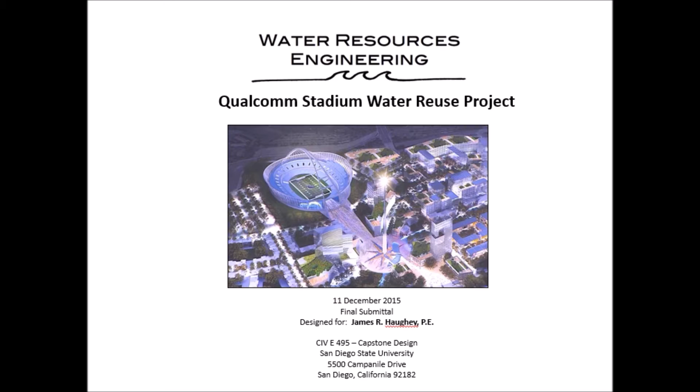WRE is composed of 6 engineers, from left to right: Environmental Engineer, Jose Alcaraz; Civil Engineer, Rob Lane; Environmental Engineer, Heather Tegley; Environmental Engineer, Fed Pinancos; myself, the Project Manager and Civil Engineer, Ismael Marquez; and Environmental Engineer, Lauren Miller.

Qualcomm Water Reuse Project's main objective was to develop a conceptual plan that could be implemented as part of any future redevelopment of the current stadium. The conceptual plan has 2 criteria that must be met. 1 is develop an alternative water supply that could be used to offset the potable water demand, and 2, develop a water quality plan. Additionally, since the region has been grappling with a prolonged drought, water features developed as part of this plan will allow the city to illustrate the value and importance of water in the region.

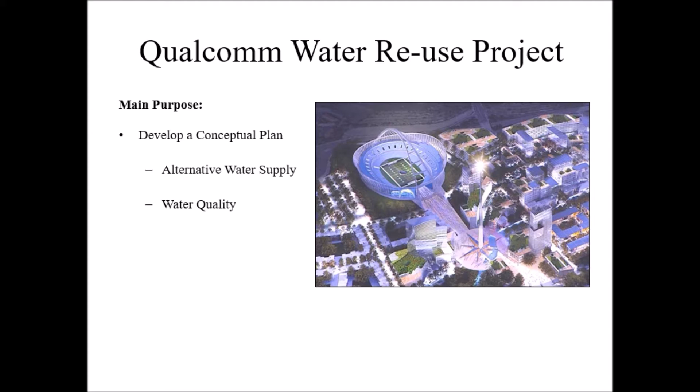WRE vetted several plans, each unique in their approach, but settled on the plan presented on the next slide. In the conceptual plan, it has been assumed that any future development will include condominium high-rises and, as such, will require underground parking structures. WRE proposes incorporating a dewatering system that would capture the water and repurpose it for use as non-potable water.

Additionally, the Serra Mesa watershed currently dispenses dry weather storm flow into the storm drain infrastructure located in the northwest corner of the property. WRE proposes capturing this water and also repurposing it for use on a future development as non-potable water. A microfiltration system will be used to clean the new water sources before storing it in an underground storage reservoir that will be detailed later in the presentation.

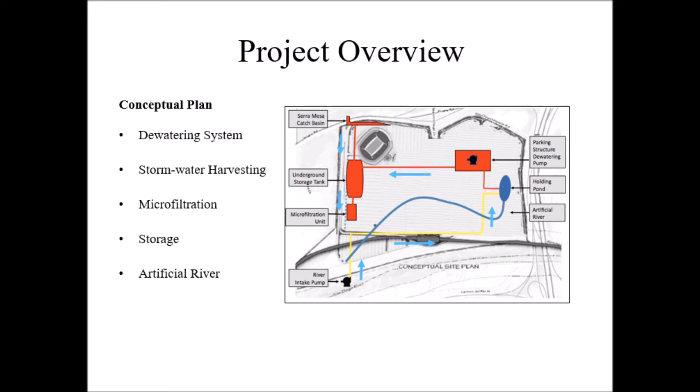The final component of the conceptual plan is an artificial river, an idea that has been floated around by various entities. The artificial river serves 2 purposes. 1, it will be a local attraction for businesses surrounding the river, and 2, it will offer the city of San Diego a venue from which to highlight the importance of local water supplies.

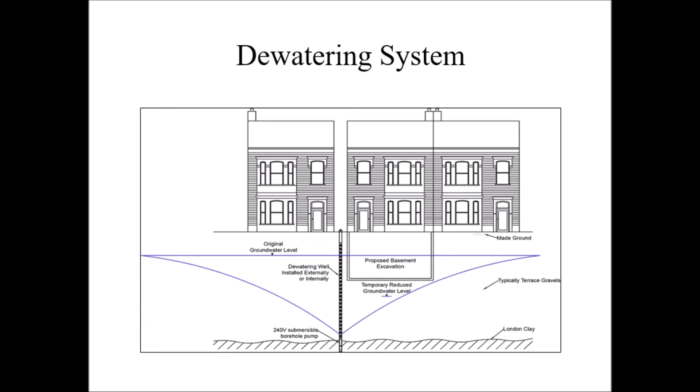Hi, my name is Lauren Miller, and I'll provide a brief summary of our permanent dewatering system. Councilmember Sherman's visionary plan for the Qualcomm mixed-use facility leaves very ample space for WRE's water reuse endeavors. With this in mind, WRE intends to put a 40 million gallon water storage tank, which is about 450 feet in diameter and 40 feet high, underground to optimize the ground level area for the mixed-use facility.

Oftentimes when excavating for a foundation, you may encounter groundwater. Now, for most, this could pose a problem, but WRE proposes to transform that problem into a solution. Based on some of the parameters from the geotech analysis, such as the hydraulic conductivity of the soils and the groundwater elevation, we will be implementing a permanent dewatering system consisting of 29 deep dewatering wells around the circumference of the tank to lower the water table approximately 15 feet, which in turn will produce a flow of 1.4 million gallons per day.

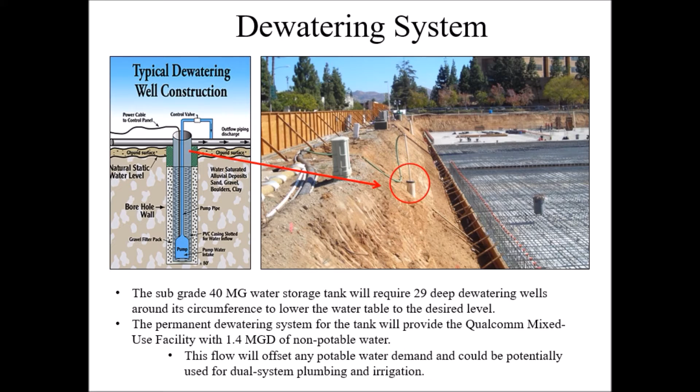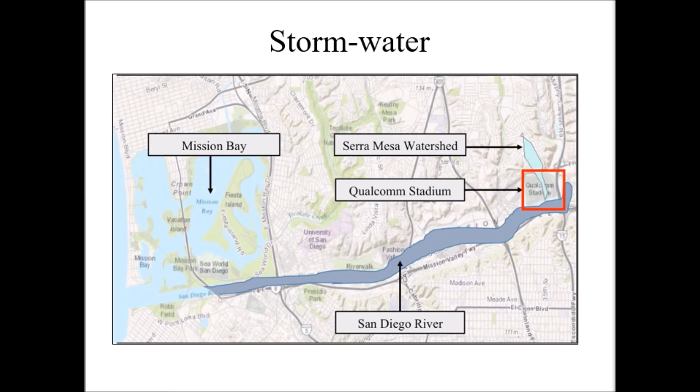Hello, my name is Jose Alcaraz. I focused on the stormwater section for this conceptual plan. As you can see in this image, the Serra Mesa watershed runs off directly over Qualcomm. This makes it the most reliable source of dry weather flow. The Serra Mesa watershed provides a dry weather flow of 1.9 cubic feet per second.

A comparable study from the Los Angeles Basin suggests that 192 GPD per acre is the average dry weather flow for multiple watersheds in the LA region. With a range of 190 to 320 GPD per acre, it is safe to say that our assumption of 190 GPD per acre is close to the average found by studies conducted in the southern watersheds found in California.

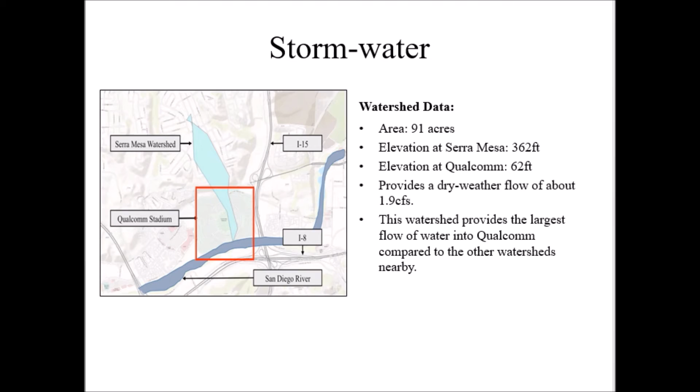As part of this conceptual plan, this dry weather flow will be captured and repurposed for use as non-potable water on a future proposed development. Given the prolonged drought in the region, repurposing dry weather flow for use is a growing trend and has been proven to assist in offsetting the need for imported water.

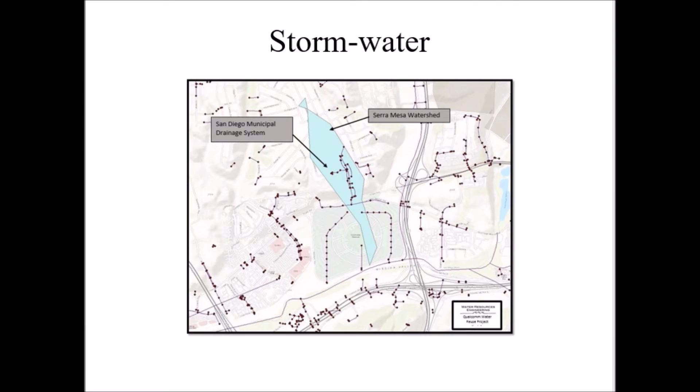Hi, my name is Frederick Pinoncos and I'll be talking about the microfiltration component of this conceptual design. WRE plans to filter the water that is carried from the dewatering system and stormwater before storing it in the underground storage tank.

This will be done to prevent the contamination of the water and the accumulation of debris inside the tank. Our design system will use a pressure of 30 psi to push the water through membranes with pores that range between 0.1 to 5 micrometers. This will take away the bacteria and will effectively remove the suspended solids that cause turbidity in water. The microfiltration system will yield non-potable water suitable for a variety of uses on the proposed development of Qualcomm Stadium.

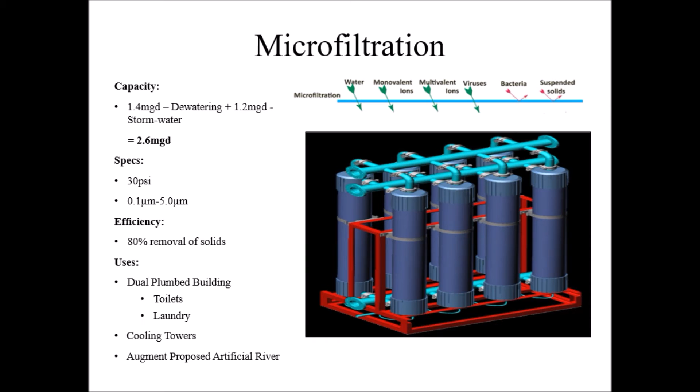The microfiltration unit will be able to provide a total of 2.6 million gallons per day, which will go a long way in reducing the reliance on imported water.

Hi, my name is Heather Tegley, and I'm going to go over the conceptual plan for the storage reservoir. The capacity will be about 40 million gallons with a 450-foot diameter and 40-foot depth.

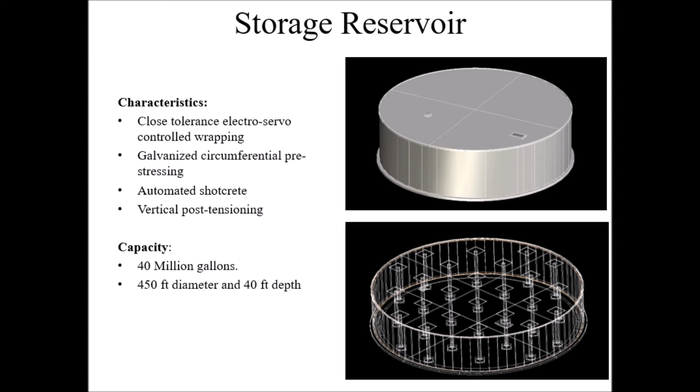The tank is designed in accordance with California Building Code 2013 and incorporates state-of-the-art features such as close-tolerance electro-servo controlled wrapping, galvanized circumferential pre-stressing, automated shotcrete, vertical post-tensioning, and utilizes flexible connections at the wall base and wall top to improve seismic performance. All of these characteristics ensure this structure will last 100 years in the seismic region of San Diego.

Hi, my name is Rob Lane. I focused on the artificial river for this conceptual plan. The San Diego River flows along the southern perimeter of Qualcomm Stadium with a flow in the range of 5 to 10 cubic feet per second. This conceptual plan incorporates an artificial river that will use the San Diego River as its recirculating water source. The artificial river will then serve as a local attraction for businesses surrounding its path, as well as provide the city of San Diego a setting to highlight the value of the water through educational features along its path.

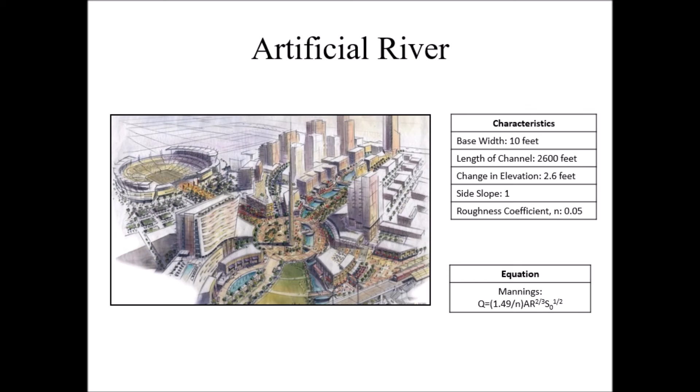The river will be pumped using heavy-duty low-maintenance slurry pumps. Each pump has a discharge capability of 3.5 cubic feet per second. Since the river will have a maximum dry weather flow of 10 cubic feet per second, up to 3 pumps will be required to reach the full potential flow of the artificial river. Each of the 3 main pumps will also have a backup in the case that a pump breaks or malfunctions, so 6 pumps will be required.

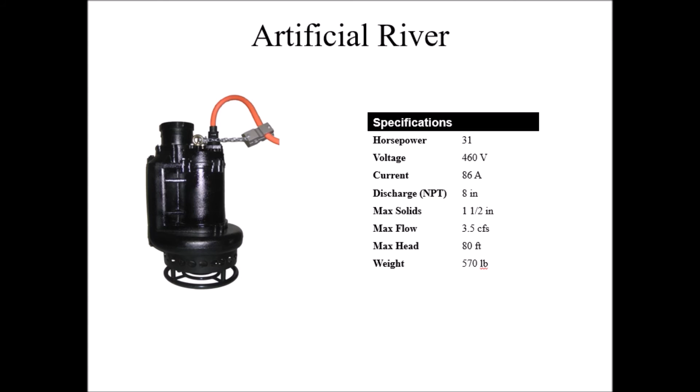As you can see in the chart, each pump has the capability of handling solids up to 1.5 inches. They are also capable of handling dry running conditions if there is any sudden decrease in the flow of the San Diego River. It's Heather again. If this conceptual plan was implemented as part of a future development, it would add an additional cost of about $23 million, as can be seen in this table presented.

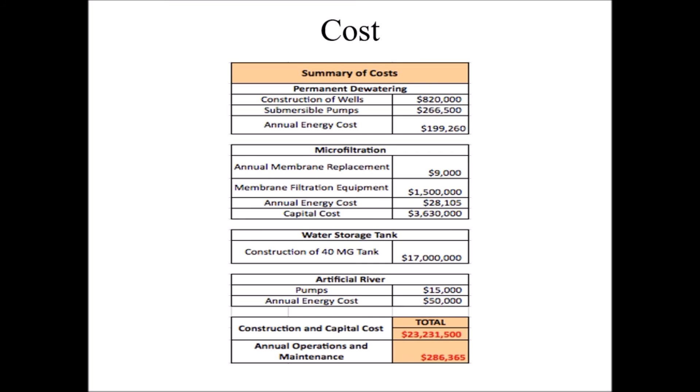Hi, it's Frederick again, and I'm going to talk about the environmental impacts involved in this conceptual plan. First, I'm going to discuss air quality. This table presents the California Ambient Air Quality Standards and the National Ambient Air Quality Standards. As shown in the table, the San Diego Air Basin currently meets national standards for all criteria air pollutants except for ozone. It also meets the state standards for all criteria air pollutants except for ozone, PM10, and PM2.5.

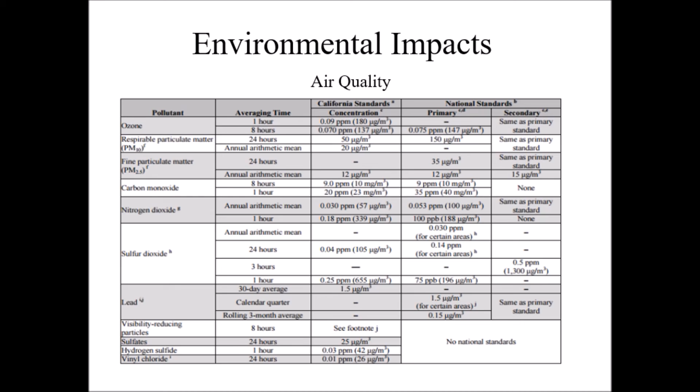Another environmental concern is noise. Existing noise at the project site is primarily influenced by noise from vehicle traffic on the roadways adjacent to and in proximity of the project site, such as the Escondido and the Mission Valley freeways. Secondarily, from the noise generated by the stadium whenever there's an event. Noise may indirectly impact special status avian species through disruption of breeding, nesting activities, and hindrance of local communication.

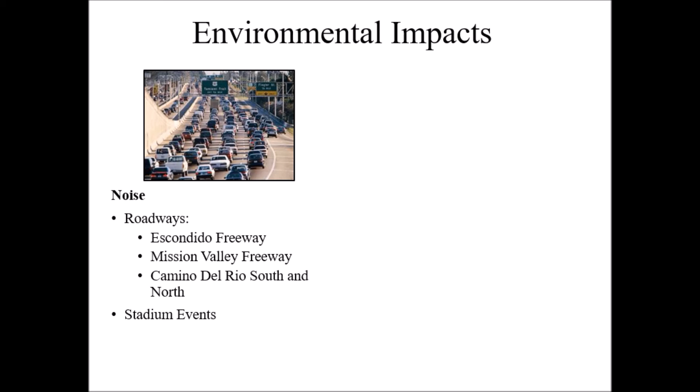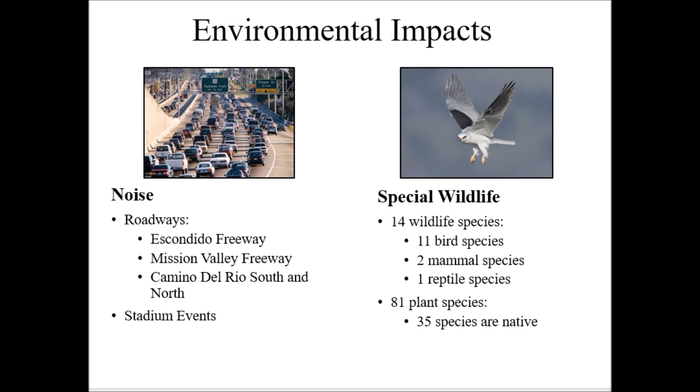WRE set out to create a conceptual plan for water supply and water quality for the Qualcomm Stadium redevelopment. The conceptual plan incorporates creative approaches that will offset the use of potable water that include a dewatering system and stormwater harvesting. Additionally, WRE has designed an artificial river that will serve as a local attraction for the surrounding businesses, as well as provide the City of San Diego a venue from which to highlight the importance of water in this region. If implemented, the stormwater flow and dewatering system will generate 2.6 mgd of flow that could be used to offset the demand of potable water.

In conclusion, WRE's proposal is a standalone plan that could be implemented as part of any future redevelopment and offer the site a local water source that could be used for irrigation or possible dual-plumbed buildings.